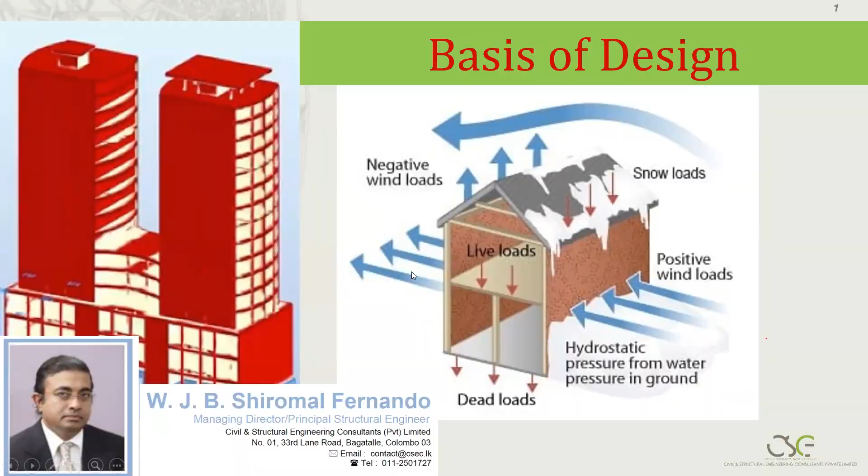As Kirivaran correctly said, my colleague, former colleague, who has been working with me on many tall buildings. As a young engineer, I was very proud of him, very hardworking. Unfortunately, or fortunately for him, his passion is more to teach, so he joined the university, but he had been working with me on many tall buildings during his stay with us.

So we were lucky, I was lucky to get involved in many tall buildings during the last 10, 20 years. These are the buildings that we have already done. Some are proposed, some are most of the buildings we have completed.

Also why we need to learn about it is now - this is what you see, the emerging skyline in Colombo. It happened during the last 5 to 10 years. We were amazed to see the change in the skyline of Colombo. You can see the number of buildings that has come during the last 5, 10 years.

And also we have a lot of projects that is going to come in this port city, new 4 square kilometer development.

So basically, if we learn the art of design, then we can retain our engineers as well as retain the knowledge within the country, as well as we can also retain the financial benefits because of this development. Otherwise, there will be a lot of foreign consultants coming in and setting up their firms, and most of the money will go outside, and the knowledge also will go outside.

So unless we train our young engineers and make them ready to take up these challenges, we will not reap the benefit of these developments.

So with respect to the basis of design, as a structural engineer, we have to look at mainly not only the gravity loads, especially when it comes to multi-stories and high-rises. We have to look at gravity loads, that is the self-weight of the building, and with height, it becomes larger and larger.

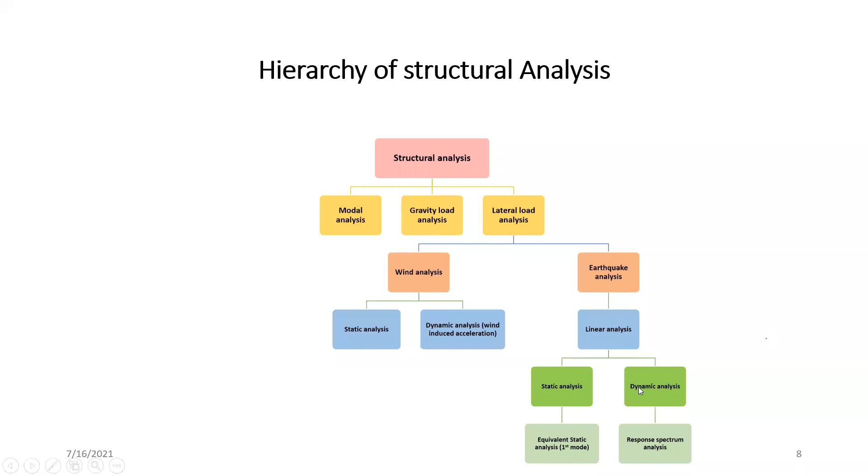So when you look at a multi-story building, we normally have to analyze the building - we have a couple of analyses: modal analysis, then gravity load analysis, lateral load analysis. We have wind load, static as well as dynamic analysis, where we calculate the accelerations. With respect to earthquake, we can have linear analysis for normal structures like static, and also dynamic analysis using a response spectrum. We will discuss all that in this talk.

And also the loads - when you have a load, we not only talk about a particular load applied on the structure, we have to look at a lot of combinations. We normally consider about 200 combinations with respect to high-rise buildings. This is the service combinations, especially one dead, one superimposed dead load, and one live.

Likewise, with wind in X direction and Y direction, we have to combine ultimate combinations. There are wind ultimate combinations and also earthquake ultimate combinations. The factors you see are based on the Eurocode, so you can have many combinations. For a small building, we consider wind in X direction and Y direction, but in a tall building, we consider wind in every 15-degree direction, because we use wind tunnel tests to calculate the effects. So all these combinations have to be put into your program, and then try to analyze.

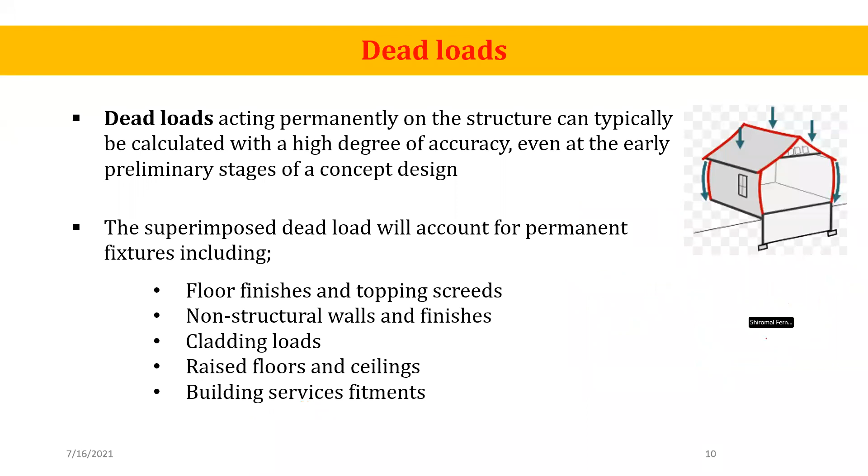For live loads in car parks, we normally use the British code BS 6399 for the driveways. It gives the recommendation for car parks, like 2.5 for the parking areas, driveways 5, and likewise for ceiling weights and crowd loading.

But what we have to understand is when we design a building, we design for a particular purpose. But actually, this building is going to last more than 100 years, and the purpose can change. So when we design a building, it should be futuristic - you cannot just go and do something, it should be flexible to change. Today's apartment building can be an office building tomorrow, and tomorrow's office building can be turned to something else.

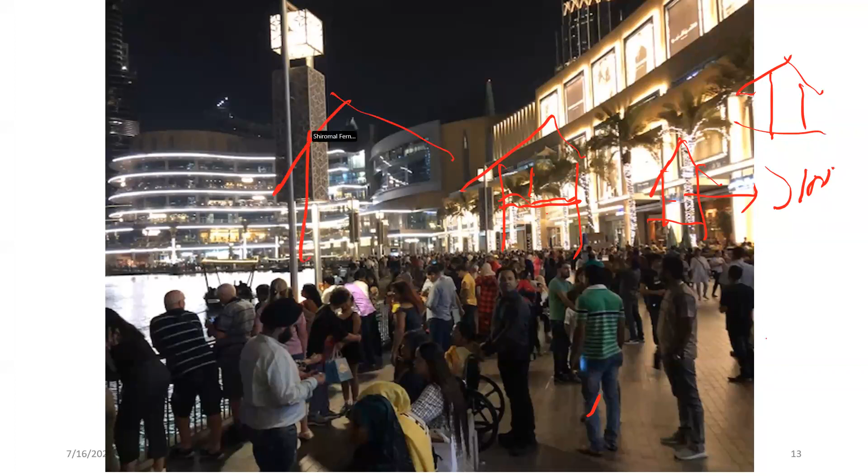So when selecting the dead weights, we have to have a logic with respect to this. We have to have a minimum load that we need to design a slab so it can accommodate future changes, and we have to have large column spaces so that we can change with time.

We will discuss this with time. Also, here is a good example - we design for a particular load, but during construction there is always additional load for stacking purposes. So sometimes if it is more than our live load, we have to ask the contractor to maybe support the slab in between, so that it will reduce the slab loads.

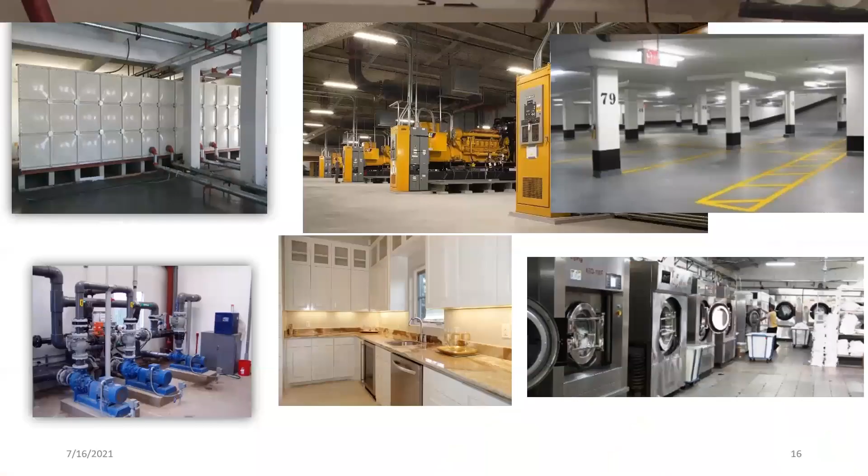These are the services at different levels, especially at the bottom level, all the services. So for service loads, you cannot just blindly take 0.5 - if the service loads are very high, we have to assume a higher load. Also there are sometimes water tanks, so we have to take the water load, machine rooms, generator rooms, kitchens, laundries, and parking floors. So for different areas you have to look at the different loads.

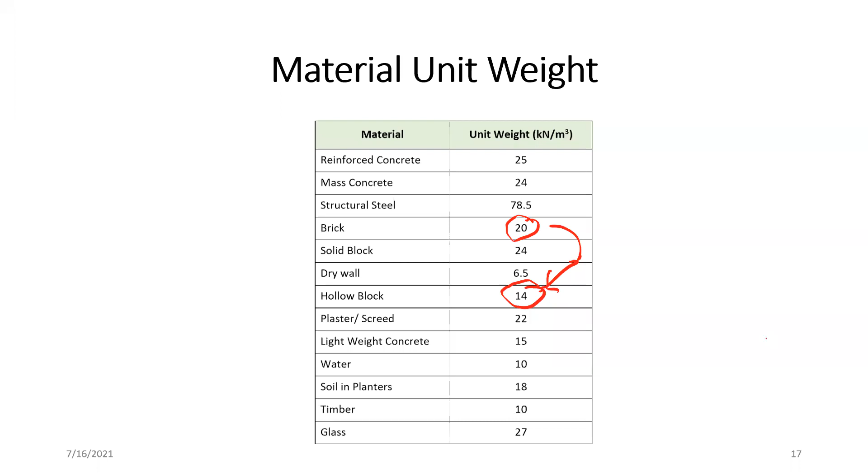This is the typical material weights that we can use. What you have to understand is brick weight is around 20 kilonewton per meter cube, whereas hollow block is around 14 kilonewton per meter cube. So we have to educate the client to change, for the sake of economy, from brick to block. It's a very difficult task, but we need to do it. And these are the recommended loads.

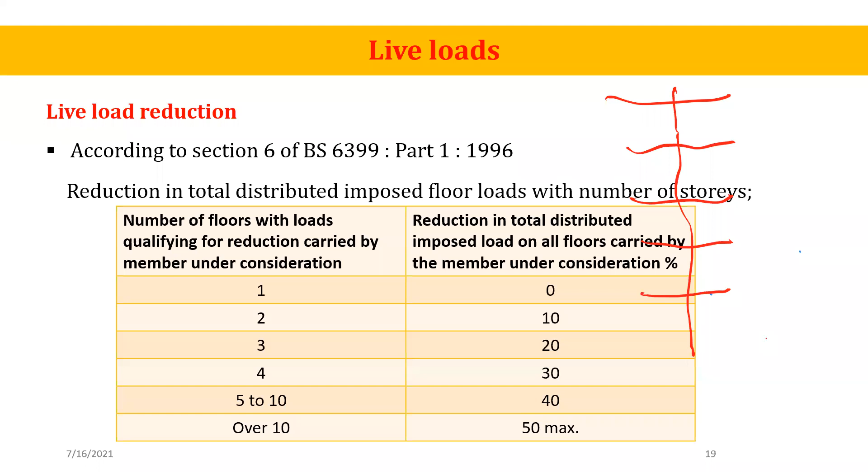The reason is there's always a probability in loading - during the lifetime of the building, you will not get the 100% load. So generally, the first floor we do not reduce. Second floor 10%, then 20%, 30%, 40%. From the fifth floor onwards, we can reduce, 5 to 10 floors 40%. After 10 floors we can reduce up to 50% of the live load.

With respect to very large areas, there is a provision in the code - we can reduce about 200 square meter slabs by 25% of the live load. So likewise, these are the probabilities given by the code which we can use.

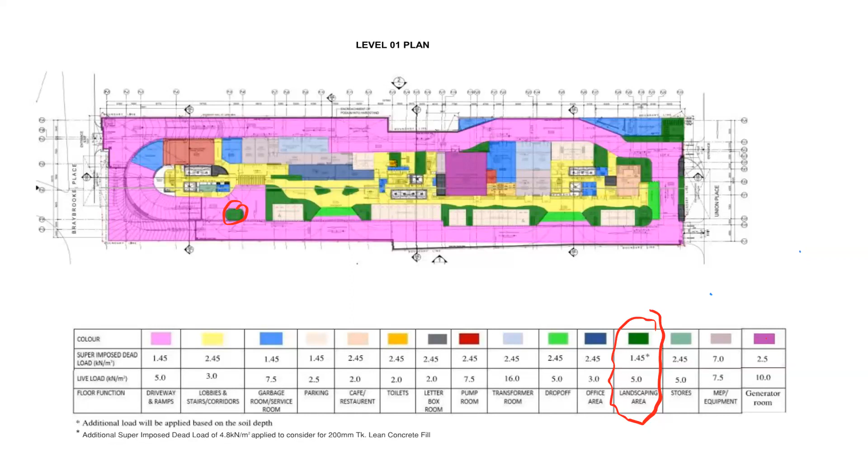When you look at a particular slab, you will have different types of loads. Maybe the green color is for the planters, so you have to have the landscape particular load. When you design something, you have to show all this in your drawing so that the contractor knows how you have designed and what assumptions you have made during the design. Similarly, in a particular slab, you will have different loading at different levels, which we need to show by a chart. These we may not be doing now.

Better start practicing. And mainly, the other thing I've always wanted to tell you all is we normally rely on the computer to get the vertical loads. So generally, I always make sure we do a manual calculation and check the computer load, because computer is garbage in, garbage out - we might make any mistake. So basically, you do a manual calculation and check whether your loads are matching with the computer software. These are good practices. This is what we wanted to introduce in this section.

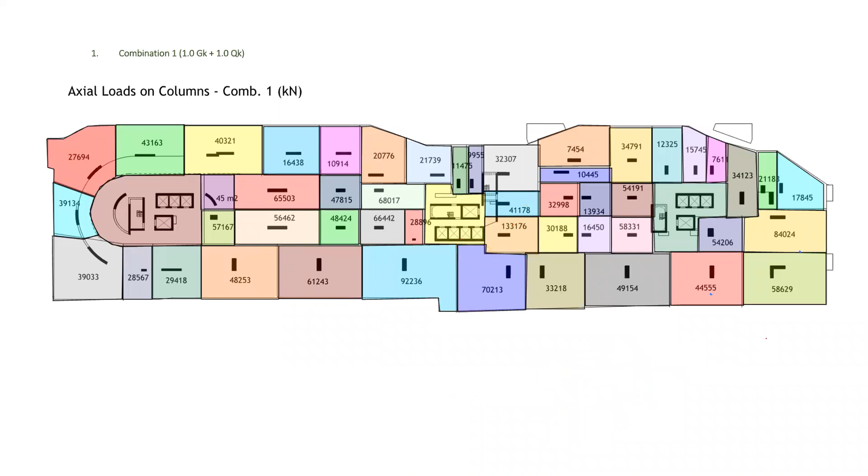Let's look at the wind loads. When you look at wind load, we just cannot take a particular wind load and design. We need to consider different aspects: the exposure conditions, where your building is, and also the wind climate studies - how the wind varies with time of year, and what is the return period in a particular zone. So we cannot just go and look at the CP3 chapter 5 or BS codes or other codes, try to get a figure and put it into the listing.

It will differ from place to place and based on the elevation. Sometimes we might need to do wind tunnel studies, which is recommended based on the slenderness of the structure.

In wind design, we need to look at two things. One is strength, so our building should not fail because of the wind, and also people in the building should not feel it move due to the wind. Especially in tall buildings, this is one of the major problems where the top stories can feel the motion, so we need to make sure that it won't happen. Also, when there's wind, there is a deflection, and we have to control the deflection - that is a serviceability condition.

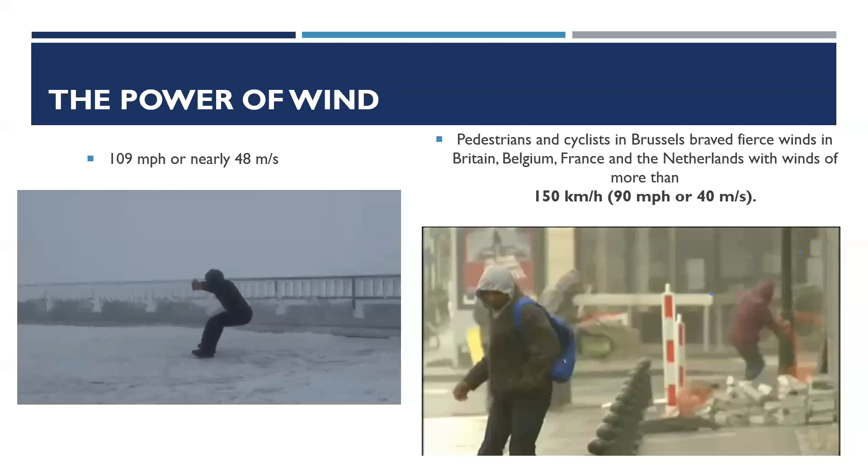This is a cyclonic wind - you can see it's very strong. This is the wind force we designed the building for, the cyclonic wind. It is in the range of 48 meters per second. During a cyclone in Jaffna, you will get much higher wind speeds.

So these are the wind speeds that we designed the building for, not day-to-day buildings.

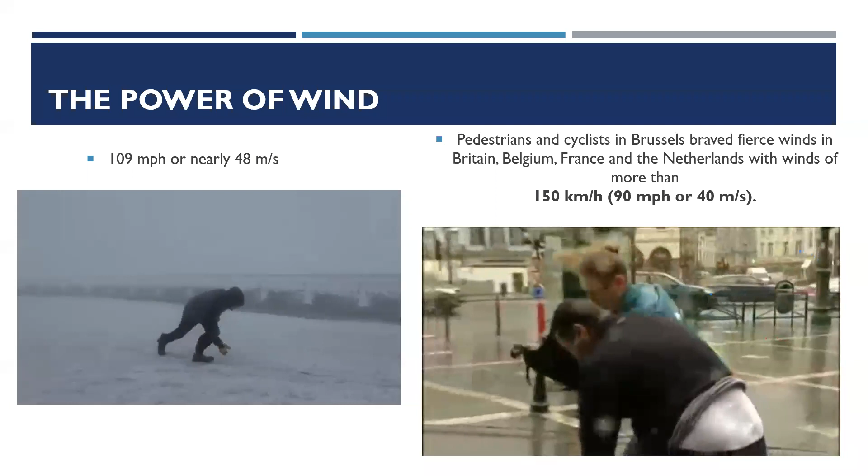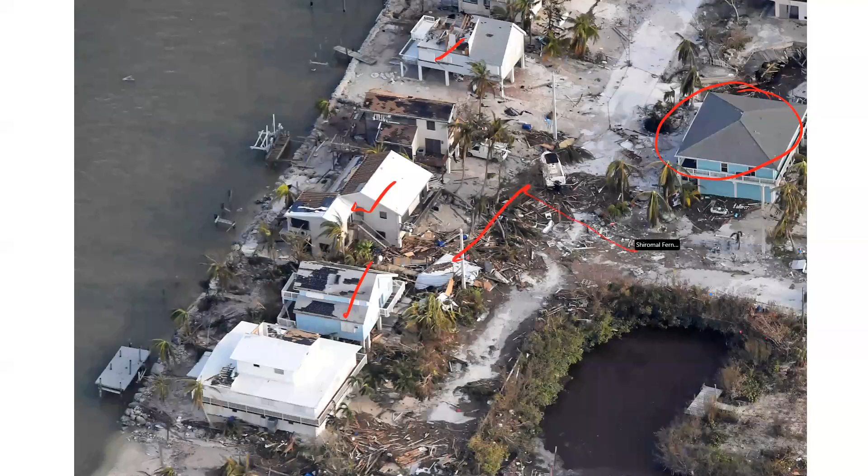Now, this is what happens after a cyclone. You can see all the gable roofs are gone, but the hip roof remains. Because of the wind, when it blows, it sucks. If the roof angle is very low, it sucks. But if the roof angle is high, it will hold the roof without flying.

The main problem is, as structural engineers, we have to understand that due to natural disasters there's a huge loss to infrastructure, so it's very difficult for a community to gain control over the disaster. There will be a lot of life loss, material loss, and economical impacts to that region. So for us as engineers from these northeast areas, cyclones are a major issue.

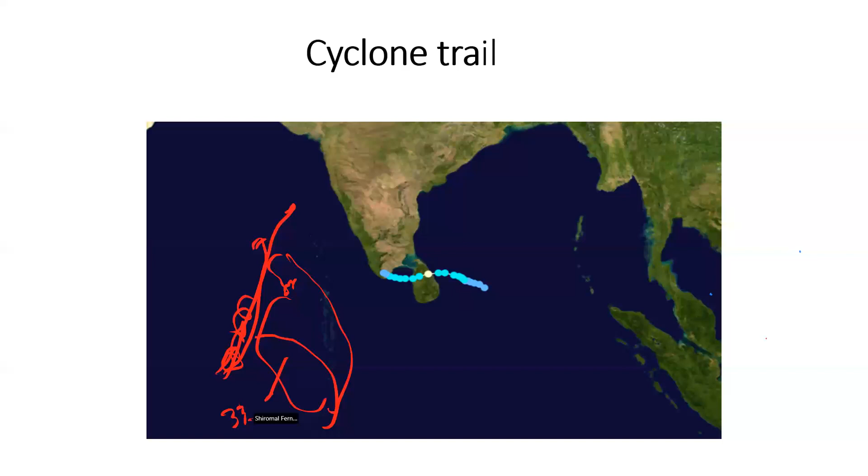And also, the dominant wind direction is the southwest wind direction. Similarly, we have to study the wind climate data. I think somebody from your region needs to study the wind climate data affecting that region - I don't think anybody has done it.

So we have installed anemometers to monitor the wind - we've installed a couple in Lotus Tower and Hyatt Hotel to look at the wind data at different levels. Sometimes we think the cyclones will not come to Colombo, but I have my doubts.

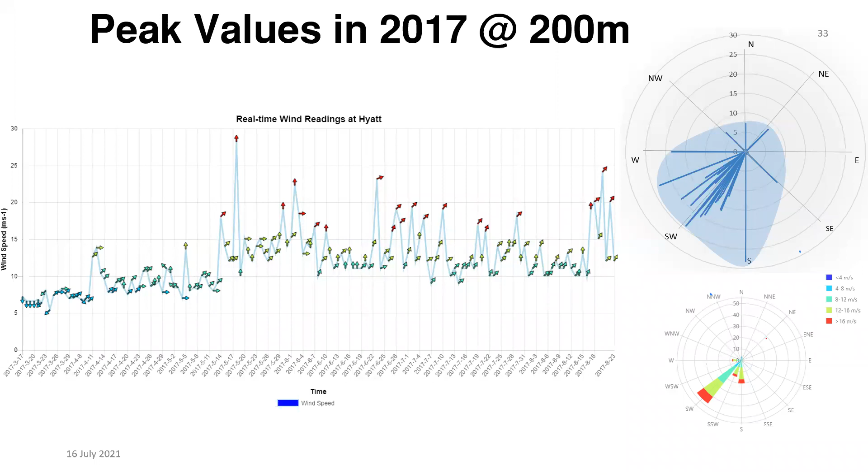As I said earlier, the north is the highest wind zone, so most normal structures shall be designed for 49 meters per second. With respect to Colombo, it is a very high wind speed. Post-disaster structures like hospitals, schools, and important structures, even multi-story buildings, I would consider designing for 54 meters per second, because we cannot build multi-story buildings that get damaged every cyclone - there will be huge infrastructure cost to the client. So I would recommend you design all structures, especially multi-story buildings, for post-disaster conditions, because you try to save a small amount of money for the client now, but he will suffer in the long run, and the communities suffer too.

We normally consider cyclone wind speeds as the ultimate wind speed, based on data with a 50-year return period. The possibility is not that it comes every 50 years, but the probability return period is 50 years. For instance, tsunamis have a return period of 400 years. So after this tsunami, I don't think we should stop worrying about tsunamis, because it won't come again soon - that's how these natural disasters work.

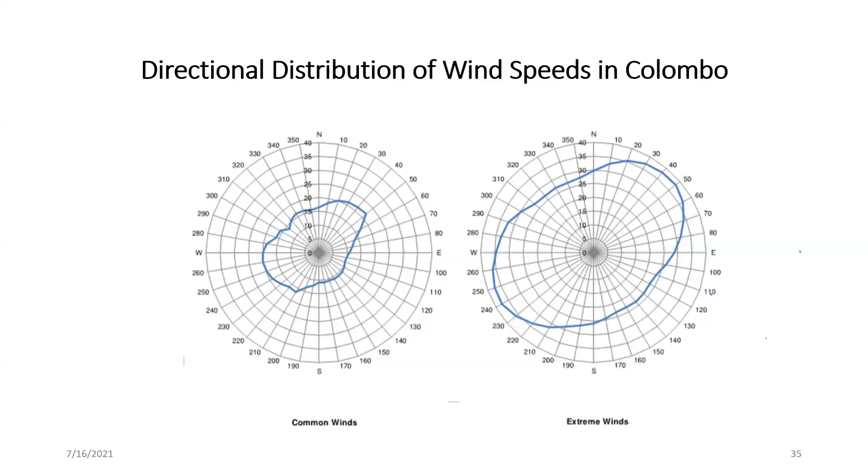So these are the wind roses - this is the normal wind, and also this is the extreme wind roses. Generally we have to give this climate data to the wind tunnel people so that they will calibrate their wind speeds according to that.

And when you talk about wind, if your building is in flat terrain, you consider the terrain category, so you will get the full blow. This is open country, and then if you are in the suburban area - because there are blocks due to this - the lower buildings will not get much wind load, you can have a lower wind speed. Higher up, basically this is the urban areas, there will be a lot of buildings.

So when we are designing high-rise buildings, we normally go for a wind tunnel test. We also need to look at the interaction with other buildings. There is a lot of software you can use to get a preliminary idea about wind modeling - you can model a city, you can model a building.

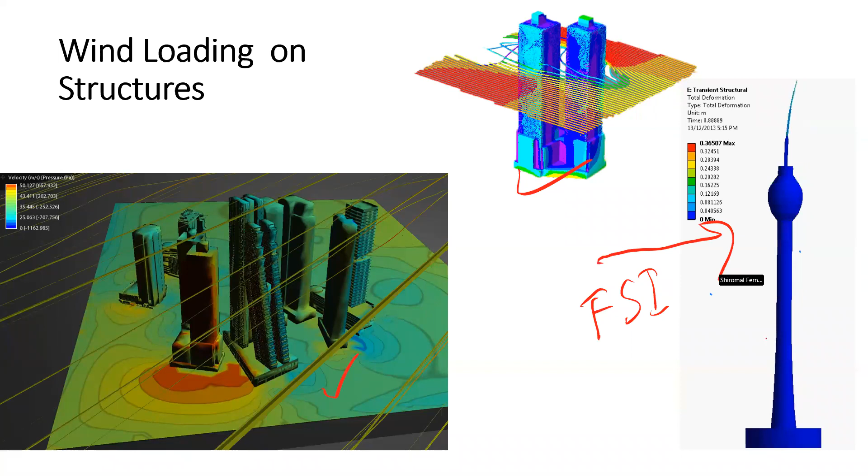This is called FSI, fluid structure interaction - when the wind blows, the structure moves, and then there's a buffeting action, you can see. It's a very complicated modeling technique, so the computer software is very advanced. We call it CFD, computational fluid dynamics.

These techniques are used in airplane construction, also car manufacturing, and now it's applied to buildings. These are very interesting software - if there are young people, better get hold of this software, it's available now.

The software that we have used is called Fluent, and also I have used SolidWorks - it's a very easy modeling software, we can use that. And even Autodesk has introduced a software called Flow. You can use one of these softwares to get an understanding.

You can see where the Lotus Tower building is moving in one frequency, and also you can see the antenna is moving in a different frequency. So very complicated analysis you can do now.

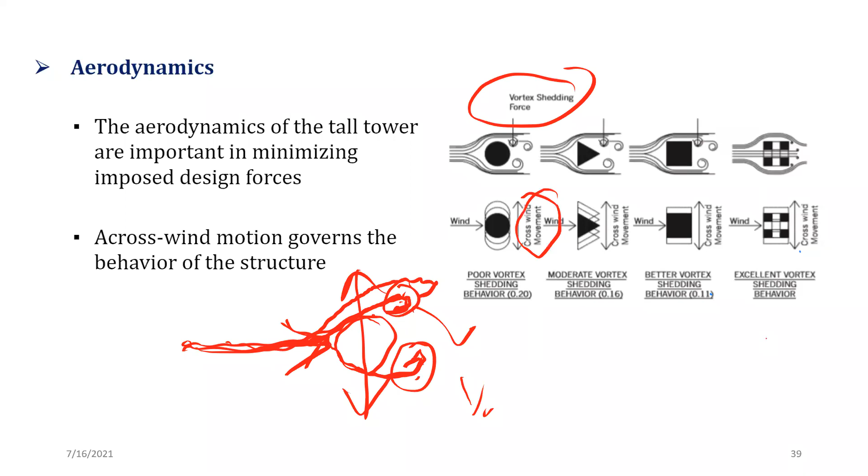We call it crosswind movement. Crosswind movement is very critical, especially when we design high-rise buildings.

Also, the crosswind effect is different with the shape. When you have voids, it will be somewhat more different. Sometimes for complicated structures, we need to go for wind tunnel tests to understand the real behavior. This is a CFD analysis we have done, where you can see the vortex shedding and the wake.

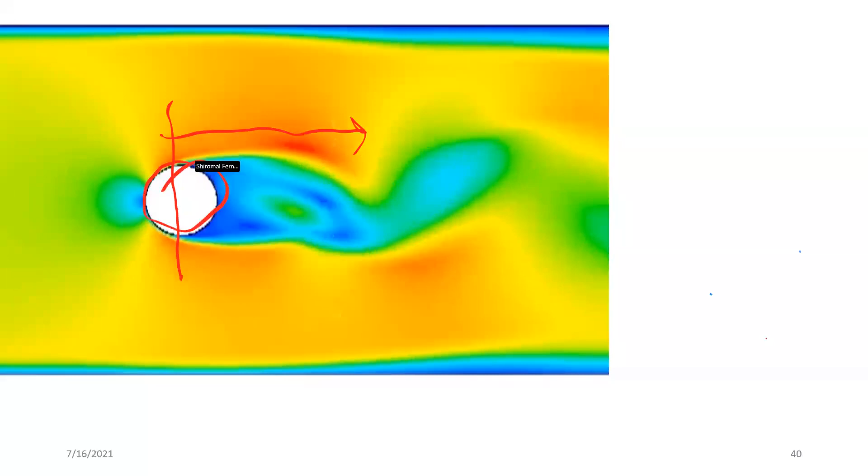It depends on the shape of the structure. For the same wind speed with a different shape, just round corners on a square, you get a different vortex shedding, and also different force. So the same area - just calculating pressure into area will not be the same thing when we come to the topology.

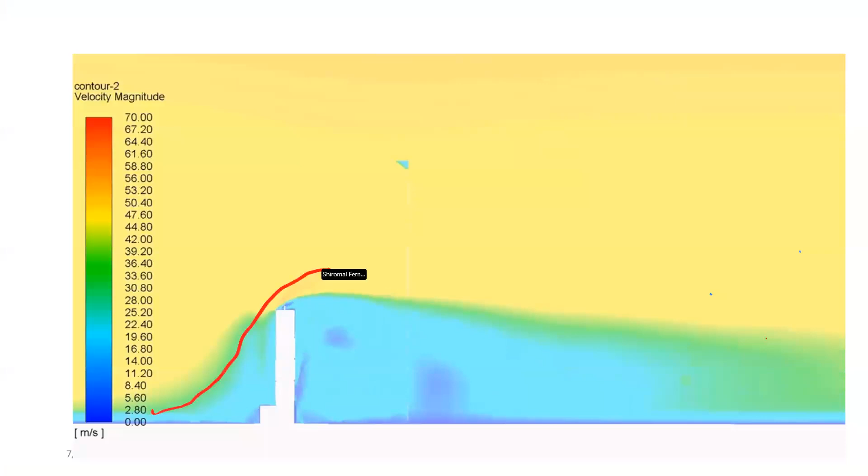Also when the wind moves, it speeds up. The force here and here is completely different. So we have to do a proper study with respect to CFD. You can see you have a negative force behind, and a positive force here, and it varies.

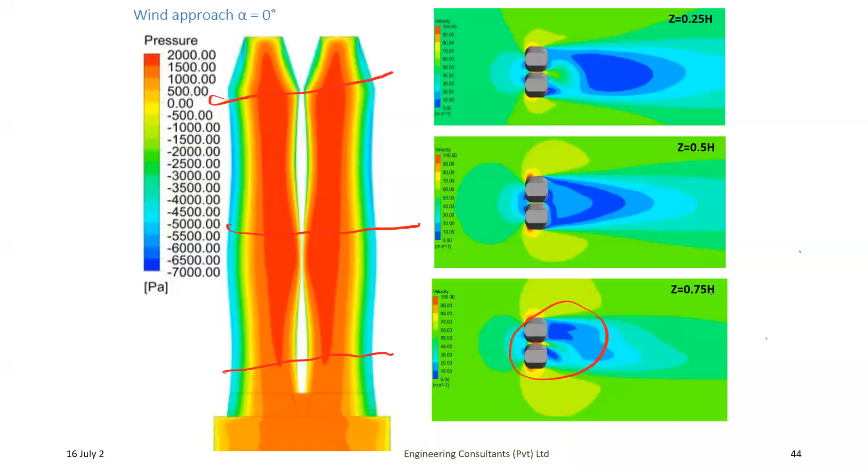So you can see with the height, at this level you have a different shedding. You have a different shedding here, different shedding here. So it's very complicated. In this one, Kiribaran did this analysis, I hope.

So basically, this is the building. It's like a wall. There were a few buildings behind, and we were worried what was going to happen because of these buildings, and these buildings can get affected. So you need to properly analyze these buildings.

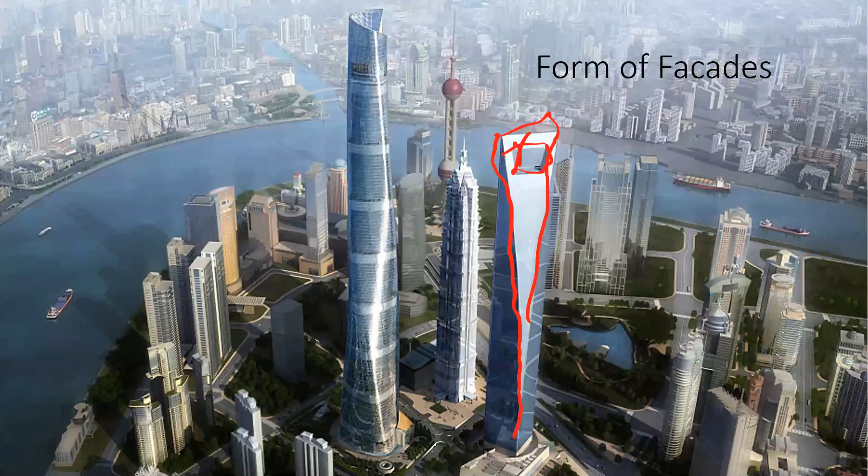Now you can see this is Shanghai. You can see this building - when you go up, the shape differs. I told you there are huge wind forces. To reduce the wind force, they have cut a hole. If you look at this Jinmao Tower, you will see this kind of detail - this is also to reduce the wind speed here.

Now, if you look at the Shanghai Tower, it's a 600 meter tall building. Every section is different, and the shape has been designed based on wind tunnels to reduce the wind forces, because by that you can reduce the cost.

Why have they done it? Let's say you have a pole-like structure with the same cross section. When the wind blows, we have shedding. The same shedding will happen provided you have the same wind velocity. So if this shedding frequency equals the natural frequency of the pole, the building will resonate and fall.

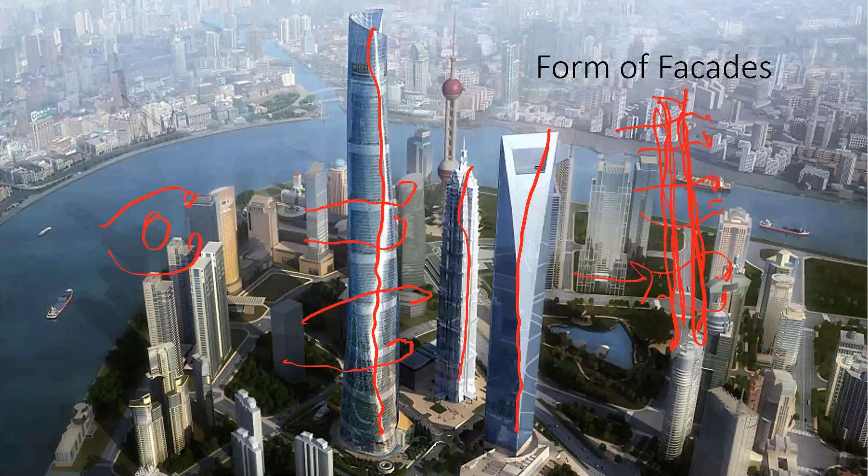This is why in tall buildings especially, they will not have the same shape throughout. Basically what they do is, when we design something, we try to confuse the wind, so the shedding frequency will never match the building frequency, and therefore it will not resonate.

Generally we model about 500 meters radius in the wind tunnel, and I hope I have some slides. From here we can get the building forces, the cladding forces, and also the pedestrian level forces.

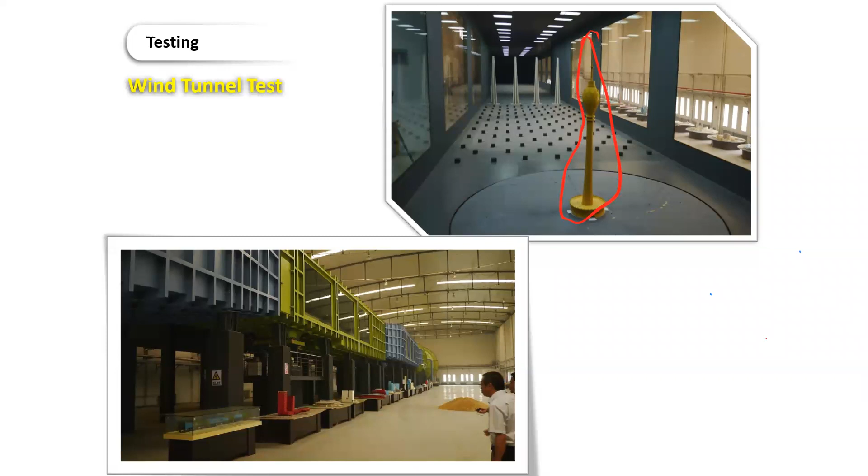This is the wind tunnel that we have used for the Lotus Tower. I have been to all these wind tunnels. This is the tower, and it's a very long tower. This we did in China, and we got all the forces based on the wind tunnel.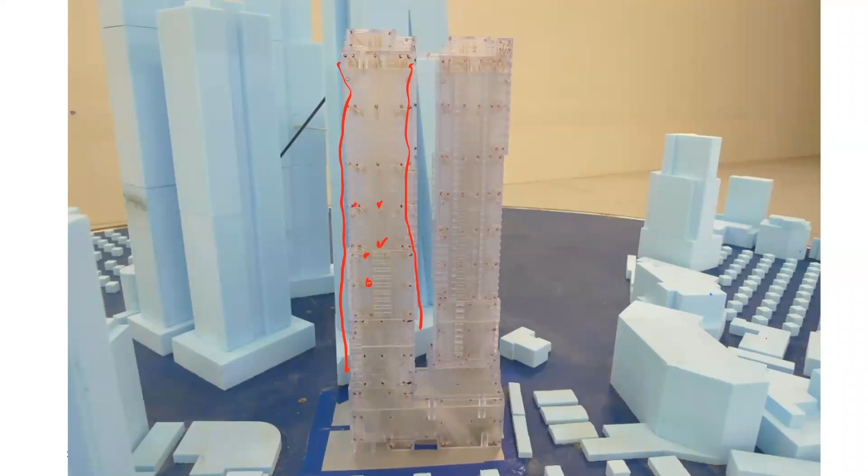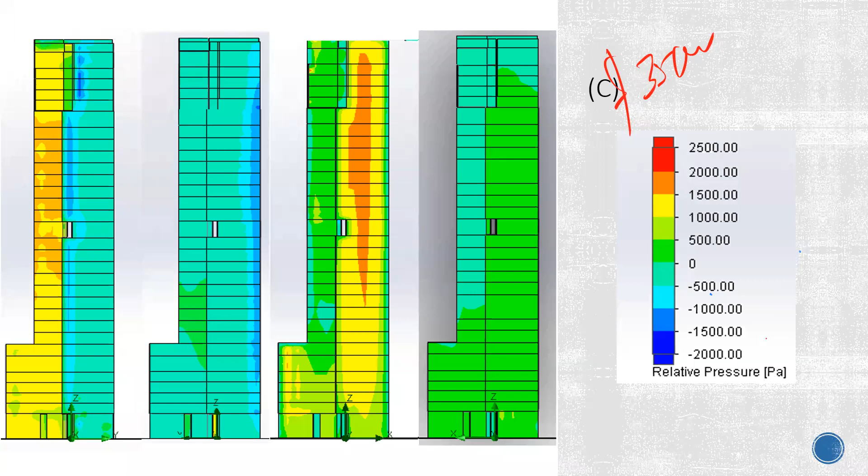Here you can see from the CFD, different areas, we can get the pressures. Now, most of the time, to do a wind tunnel test, it will cost around $35,000. But a lot of people don't want to go to wind tunnels, or think that we are doing experiments with their money. So we have to use CFD methods to calculate. There are different types.

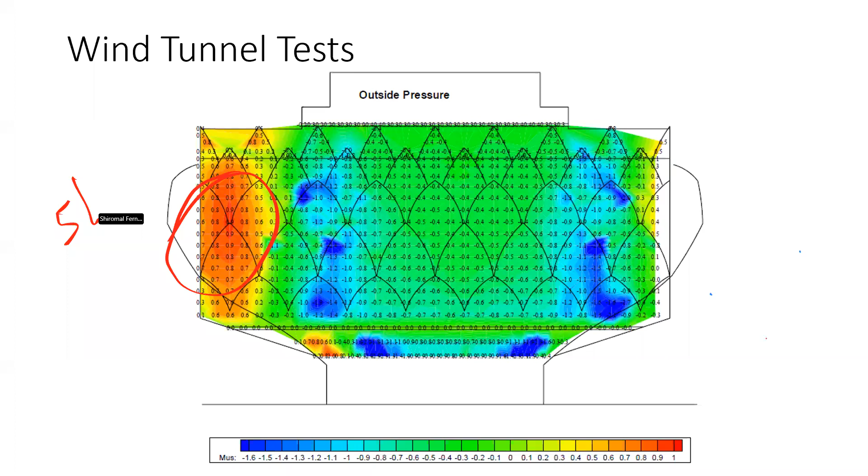Generally, the prototype scale is about 1 in 400 to 1 in 500. So when you do a wind tunnel test, you can get very high winds, which we will not be able to estimate using codes. If we made the code, generally we design the facade for about 5 kilonewton per meter square, very high wind speed.

So for wind effects, generally a 10-story building will move about 15 millimeters. A 30-story building will move around 50 millimeters. A 50-story building will move around 200 millimeters.

Mainly the problem is the people on tall buildings will have perception issues. Very sensitive people can even sense 5 milli-g vibration, but most people are in the range of 10 to 25 milli-g. So when we are designing tall buildings, especially for offices, we design for about less than 20 milli-g. For residential, we design for less than 15 milli-g.

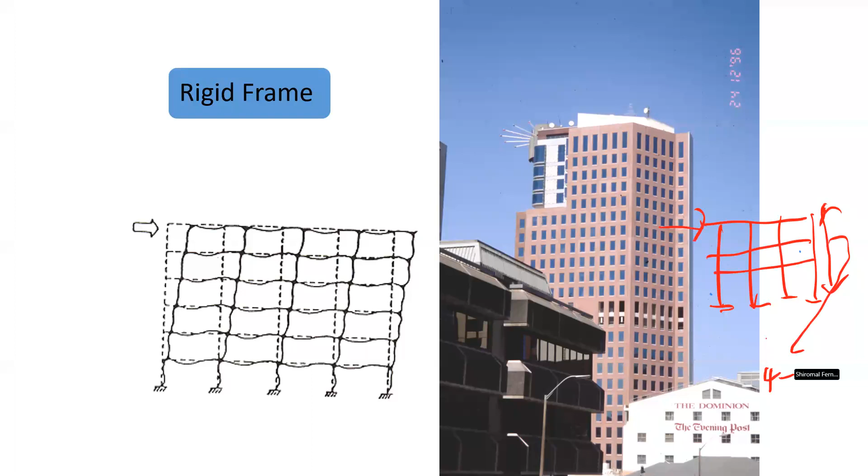So basically, with my experience, I will tell you, you can go up to about 14 to 15 stories using just a rigid frame. When you go above that, we have to incorporate some shear walls into the structure. So in this case, let's say you have a frame like that - maybe you can use a core to resist the shear, or you can use frames coupled with the core.

So if this is only a rigid frame, that is an unbraced frame, where wind will be taken by that. Sometimes if our cores are very large, the total wind load can be taken by the core. Otherwise, we can engage the frame and the shear wall together. Those days we used to analyze this because there was no software to analyze 3D.

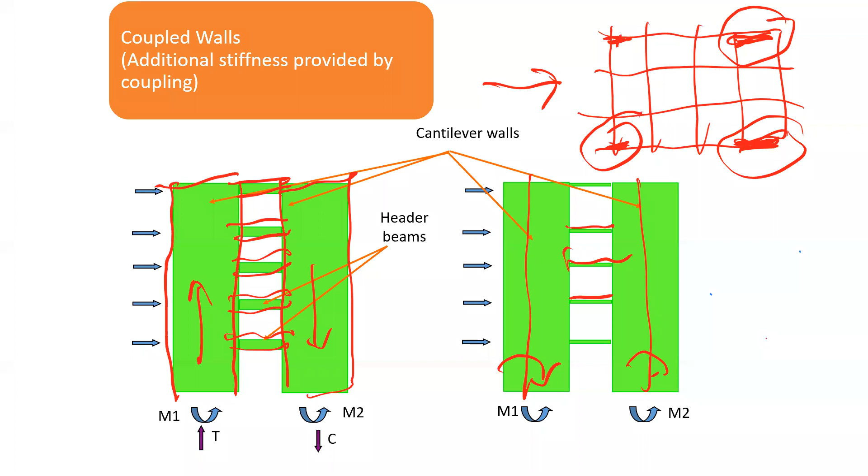So basically, let's say you have a building with a shear wall here, and let's say you have a small shear wall here. When you apply a wind force, this wall, based on the stiffness, will attract a larger force than this wall. It will always be based on the stiffness, and based on that, you can design.

These are actually applicable to tall buildings, where generally we try to use outriggers and spandrel beams to connect to the core wall, so that it will act together. So there are many tricks that we use when designing tall buildings in order to tackle the wind. I will just introduce this in this course.

You can see these are the outrigger spandrel beams and the outrigger levels. Mainly, we put them at the service levels, because when you design a tall building, you have to have service floors every 20 floors.

If we try to do a high-rise course, we can do it. So these are my experiments with respect to the structures.

So it's a 50-story structure. If you don't have outriggers, it will deflect 200. If we have one outrigger, 185, and also here 175. With this experiment, what I'd like to show is that this area will act like a cantilever.

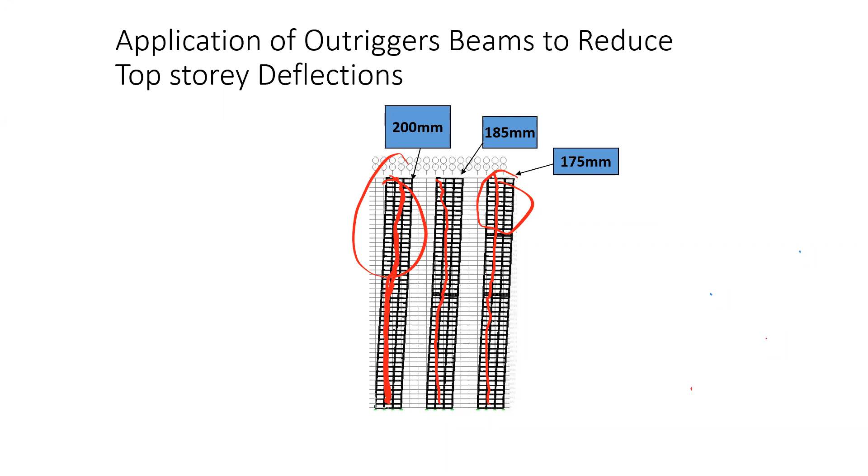These are for very high buildings, more than 60 stories. These are called super tall buildings, where the whole tall building is like a suspended cantilever. So this whole thing will be a cantilever.

What will happen is there will be columns at like 3-meter centers, and it is like a frame tube joined by a spandrel beam, acting together. So generally you get a shear lag at the corners, and you get higher axial forces at the corners due to the shear lag.

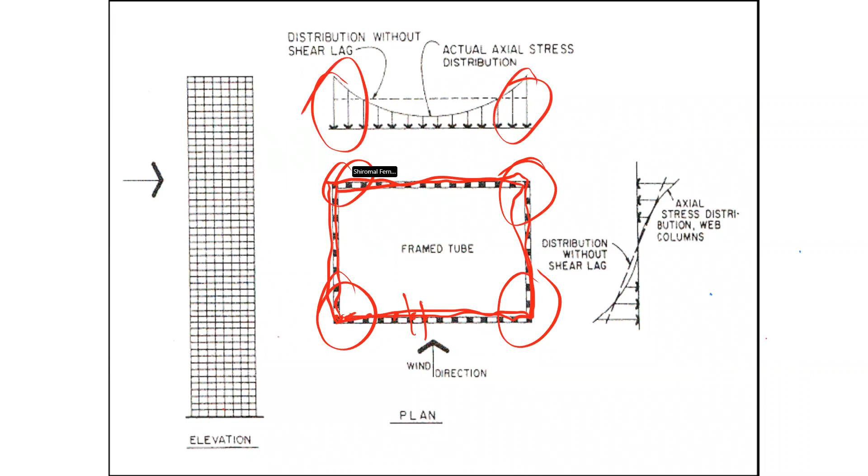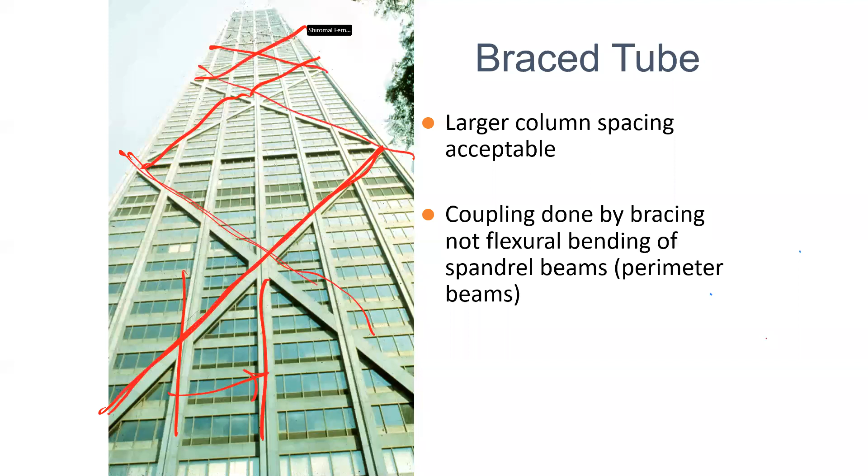Again, this is for high-rise structures, where if you want to increase the column spacing, you need to use a brace frame to brace the tube, and then you get a braced tube structure. You can see all that.

Mainly the idea is, how do you make it more efficient to resist the wind? So if it is equally spaced, it is 50% efficient. If all the mass is at the corners, you can balance it, so this is 100% efficient, but at least you need to go to about 67% efficiency with respect to the lateral force.

These are called performance criteria, following ISO guidelines, where for a 1-year return period, your office building has to have acceleration in between let's say 7 milli-G to about 13 milli-G. For a 10-year return period, it is in the range of 10 milli-G to like 20 milli-G.

So this is the modal analysis. Actually, there are so many buildings together. When you analyze a building, your first mode should be translation, and the second mode should be translation. The third mode, because there are so many buildings, should be a rotation, right? If you do it for one building, you will easily see that.

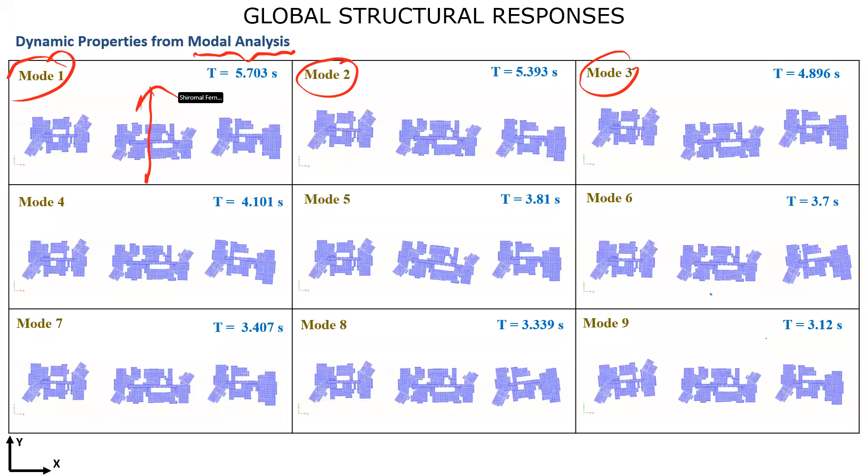So from the period, we can see the period, 99% is translation. Here, mode 2, this is building 2. Building 2, let's say building 2. Here it is a rotation. Building 2.

There is a translation here. So basically, sometimes for very tall buildings, you might not get the ideal situation, but for most normal buildings, you will get this ideal situation.

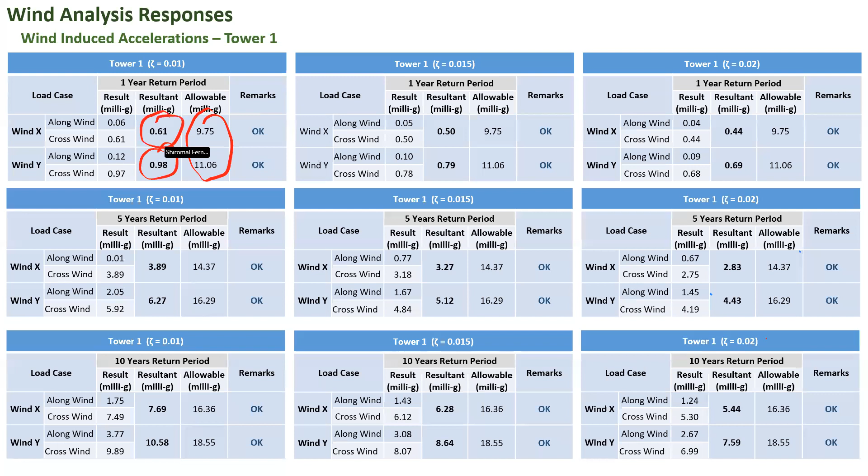Then we calculate the accelerations, and these are the allowable accelerations. We calculate the acceleration mostly using the code. When you calculate in the service condition, we normally use a damping of 1%. These are more relevant to the, so for completeness sake, I have put it in.

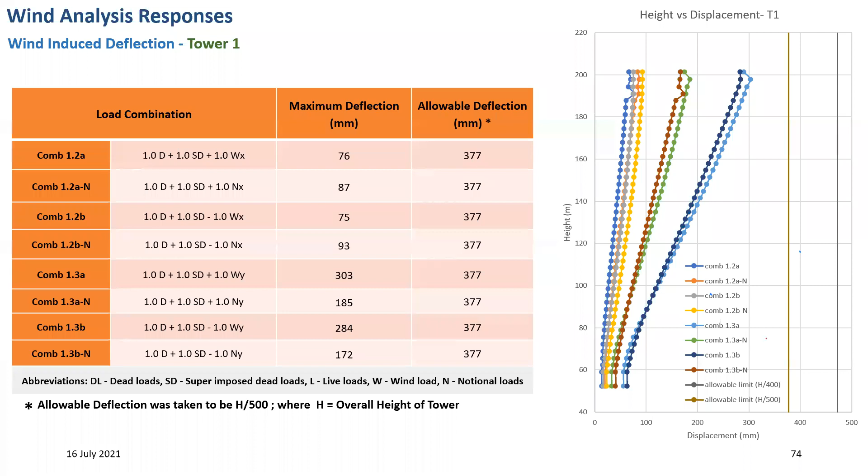Here, this is the building drift. Drift is generally 0.2%, that is height over 500. Now let's say you have a 3000 millimeter building height. If you divide by 500, you get about 6 millimeters. So basically, that means the relative displacement between this floor and this floor maximum is 6 millimeters.

You need that, because if it is more than that, your facade will break. For tall buildings, we can go up to height over 400, but then we have to tell the facade people that this building drift is much higher, and then you need to look at that.

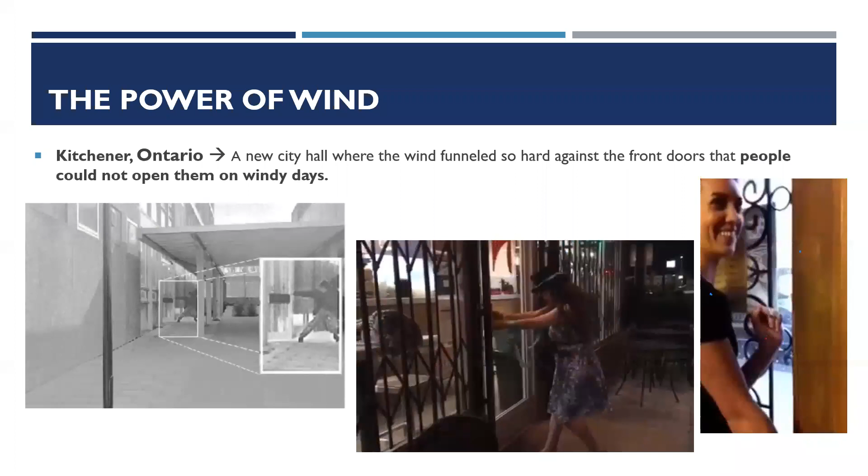Pedestrian level wind is very important when we build buildings. Due to the wind, buildings affect people, though there are no hurricanes or anything like that here. For the normal wind, this is what is going to happen. I think in Jaffna, sometimes you get very high winds.

So it's very important, mainly because when the wind hits, it has a downwash, and then sometimes venturi effects, and also the effects due to what I told you about in the upper level, called the vortex effect.

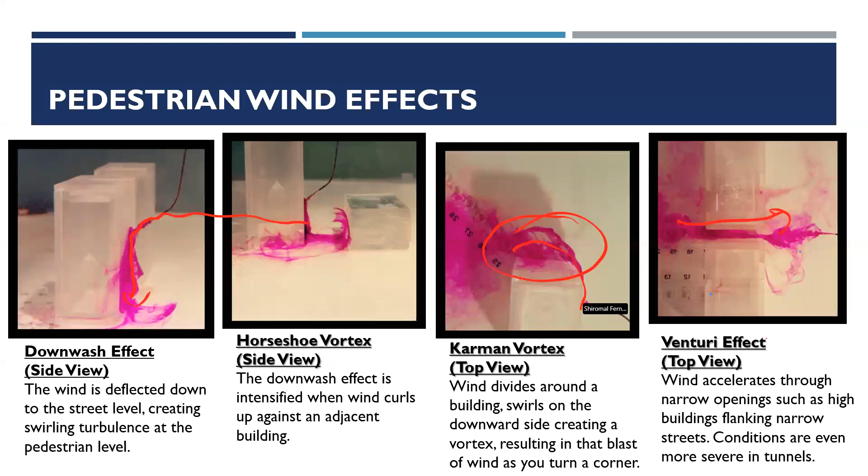So some of the mitigating measures, especially since I was talking about wind, Jaffna is a very windy place where you need to have tree covers to reduce the pressures, maybe barriers, screens, and also some cover.

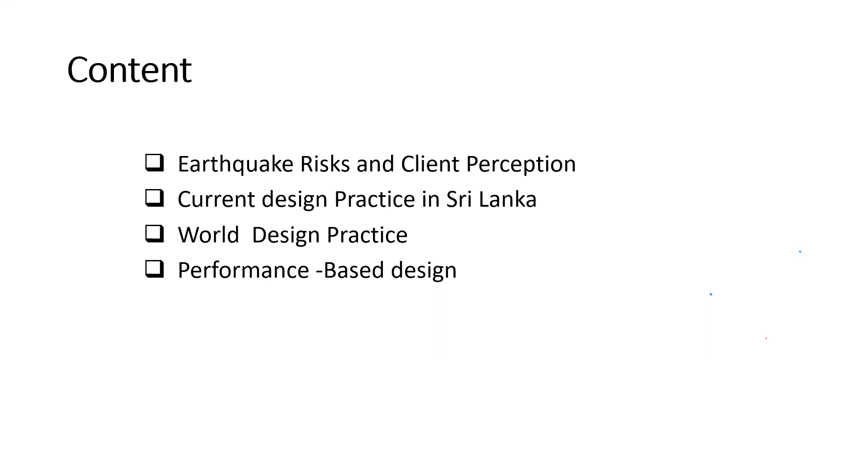Earthquake conditions, a lot of people think earthquake is not a major issue, where earthquake will not happen, but after the tsunami, people changed their minds. I will tell you the current design practice and also the world practice, the performance-based design practice that we do in our office.

So basically, if you look at the seismic monitor every day, every minute, there are a lot of earthquakes happening around. We got a major issue because of the earthquakes in this Burmese plate, and then we got a tsunami due to that in 2004.

So mainly, the whole world has been divided into 13 plates. We are in the Indo-Australian plate. Mainly, the earth's plates are not dead, they are moving all the time. Some plates are moving toward each other, some plates moving away.

So because of that, the stresses will get built up, and then there will be shakes. So luckily, Sri Lanka is very close to, is in the center of the plate. And Australia also thought the same way, but after the Newcastle and Sydney earthquakes, then people were thinking, what happened?

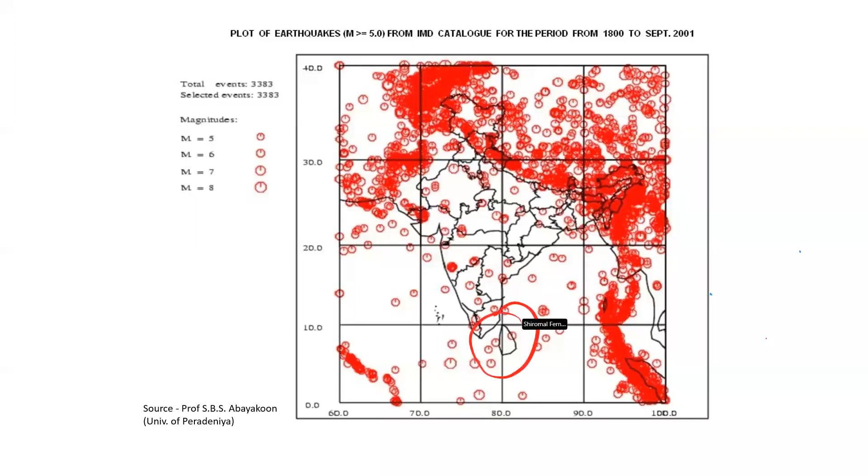So basically, this is work done by Professor Abayakoon, a Peradeniya University professor. These are the historical earthquakes very close to Colombo. You can see there have been a few earthquakes, and this is the possible plate boundary that you can see is moving away.

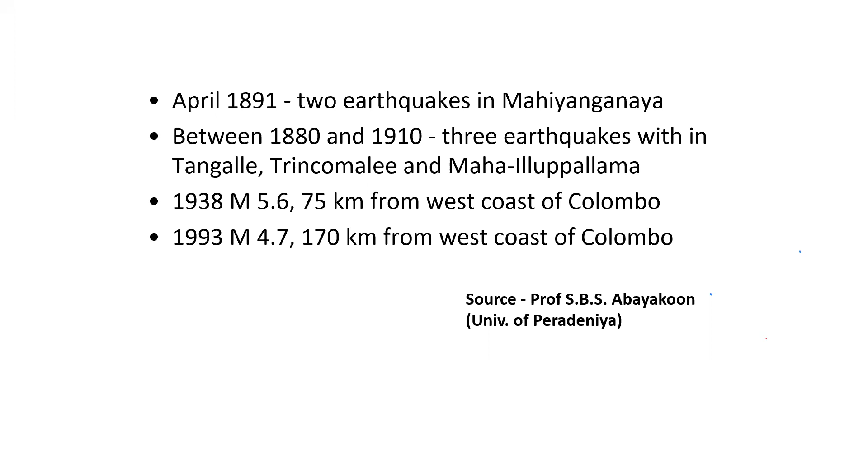So these are some of the dates and locations according to Professor Abayakoon's research. There had been two earthquakes in 1891 in Mahiyanganaya, between 1880 to 1910 three earthquakes within Tangalle, Trincomalee, and Maha-Illuppallama. In 1938, there had been an earthquake in West Colombo, and also in 1993 in West Colombo.

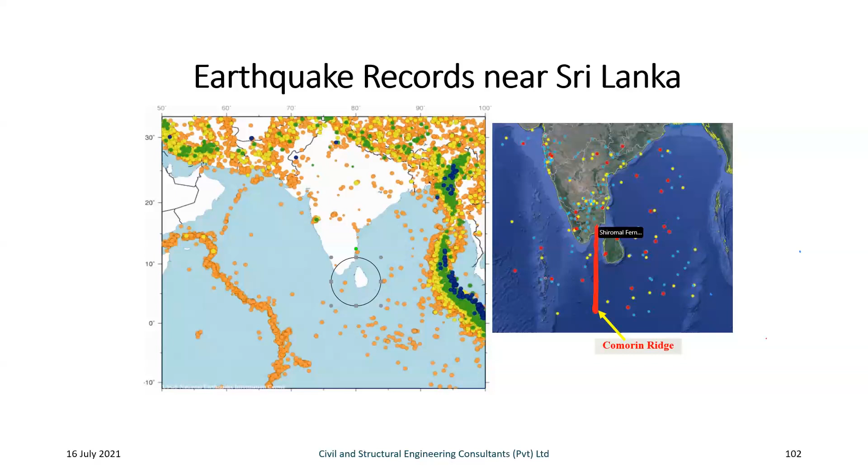In September 1938, there had been a major disaster. And also, according to geologists, there is a soft subduction phase where sediment fills this area, and then there's a possible hotspot very close to Colombo. What they say is we call it the failed Mannar rift zone. So these earthquakes, 1938 and 1615, are due to this. The main CBD is Colombo, and something happened very close to Colombo.

Then there will be a big disaster to the whole country, and we were interested from the beginning on this. In 1994, there was interest by the Society of Structural Engineers, and we were detailing according to the UBC codes, and later on the Society of Structural Engineers issued a guideline.

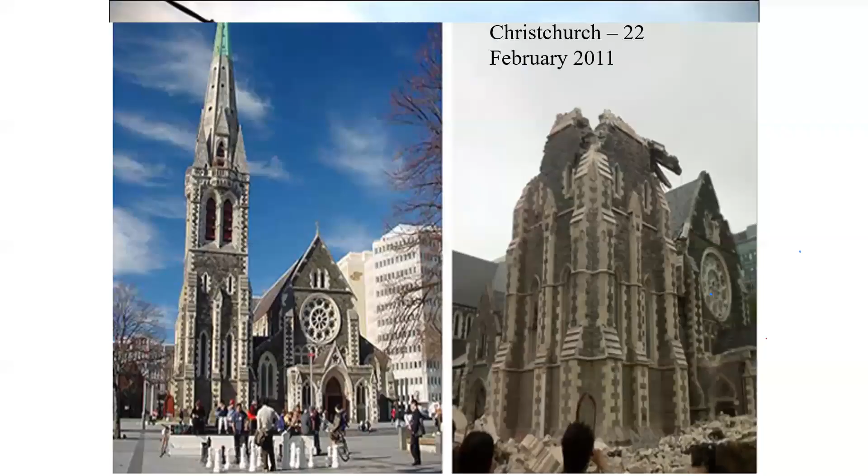I will tell you the reason. This is what is going to happen. Mainly, the tall buildings are safer in an earthquake than the smaller, shorter buildings. The reason is - you can see this building failing.

The main reason is, let's say this is the time history - this is the time. You get very large shakes at a very small period here, and it will die down within a couple of seconds, let's say 4 seconds - it will die down. So very high accelerations here, and the period is very low. When I told you, the building period is equal to the number of floors divided by 10.

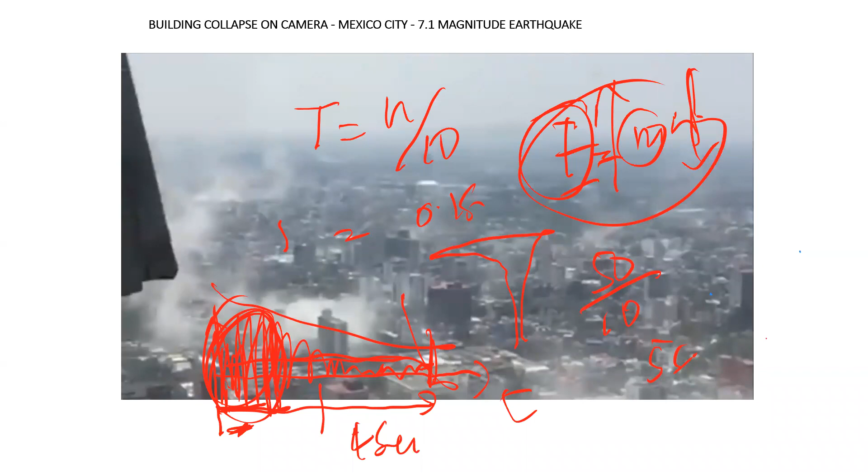So what happens is, especially if there is a shake, if your soil is very loose - due to the earthquake there will be huge energy, and due to that we will have a very high pore water pressure. When you have such a high pore water pressure, this soil becomes like liquid. So if that happens, your building will anyway fail, right? So if you're liquefied - generally when we design a building, we check the liquefaction potential.

So unfortunately, we don't have shear velocity tests in Sri Lanka. So what we normally do is we check the SPT values. If the SPT values are greater than 15, there is a very unlikely chance of getting into this liquefaction, so the liquefaction potential is very low. So if the SPT is less and you want to build something there, then you have to compact it to achieve that.

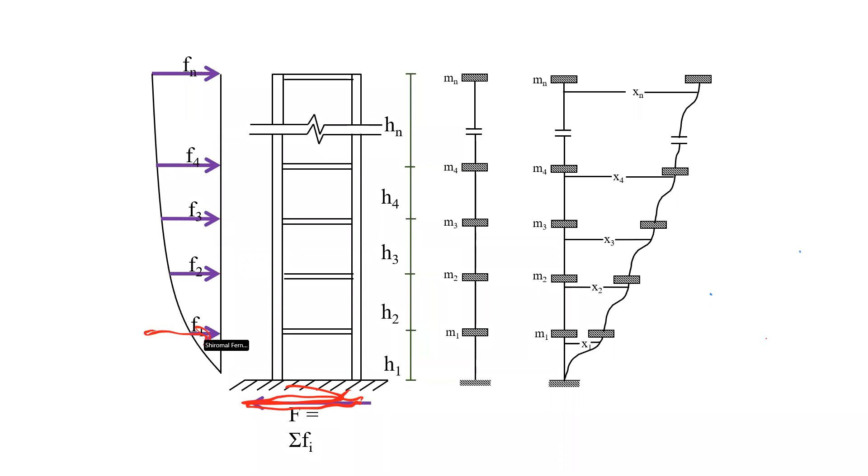So what happens during an earthquake is the ground is shaking, and the building starts resisting. When something is shaking, it tries to shake, and buildings start resisting the shake, therefore you get an inertia force acting on the building.

With respect to wind, the force corresponds to the area. With respect to earthquake, it corresponds to the mass. So there will be a shake, and then there will be an inertia force based on the mass and the acceleration.

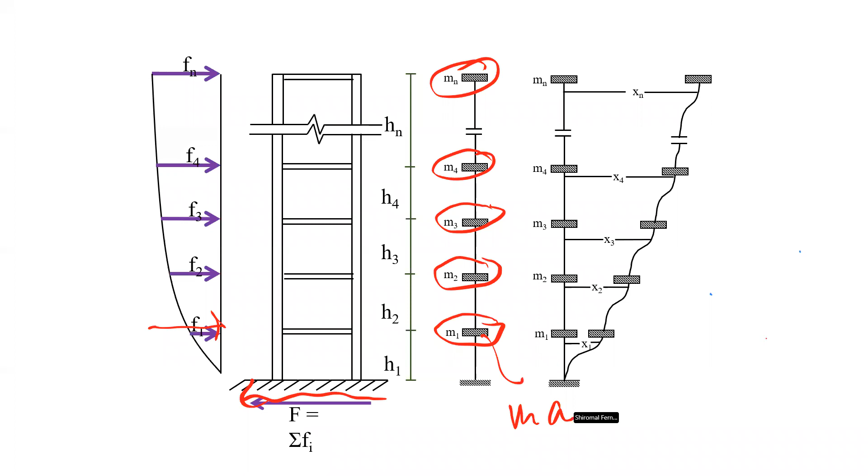So you can see, I showed you - the earthquake force is very high at the top, and this is why it failed.

And as structural engineers, what do we do? Now we have a force, so we have to dissipate this force through our structure. If the beams are thicker than the columns, it will dissipate through column hinges. Hinges will form and it will fall. All the videos you saw of buildings falling is due to plastic hinges forming in columns before the beams.

Now, in this case, if we try to design a hinge in the beam, maybe let's say pin supported, you detail it so that all the hinges, even the column bottom, will survive because this is no problem.

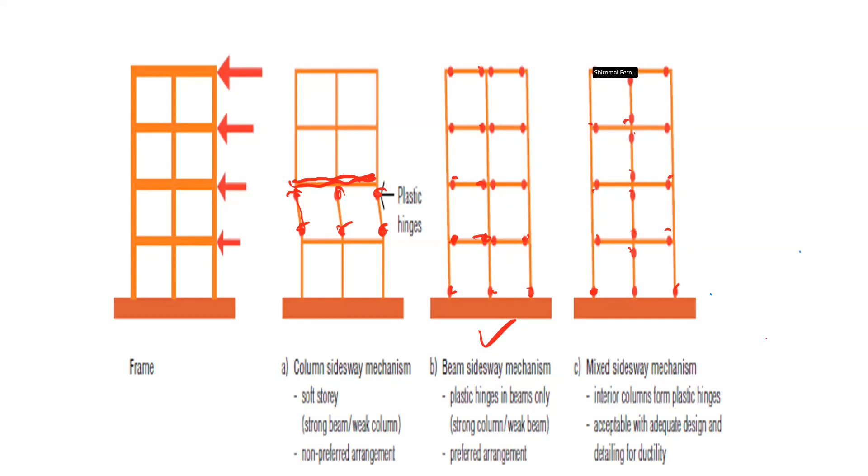Or like that - so we also can. So actually, the engineer has to decide how to dissipate the force. Basically you have to select the preferred location to have the hinges when there is an earthquake. And if it is done in the correct way, we call this ductility detailing.

Now, this is what happens during an earthquake - this hinge failed.

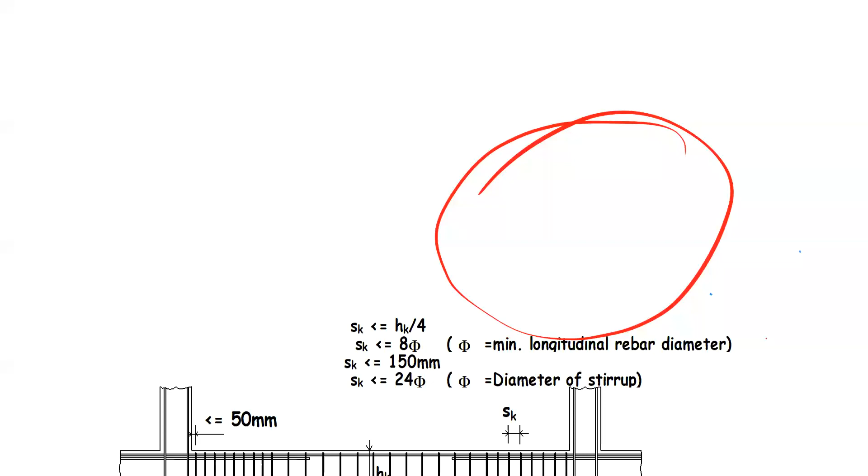Therefore, if we want to survive, we have to increase the shear reinforcement. By doing that, you confine the concrete, and it can last for a couple of seconds. As I told you, this will die down very fast - after 4 seconds, it's negligible. So if your building can survive, these joints can survive.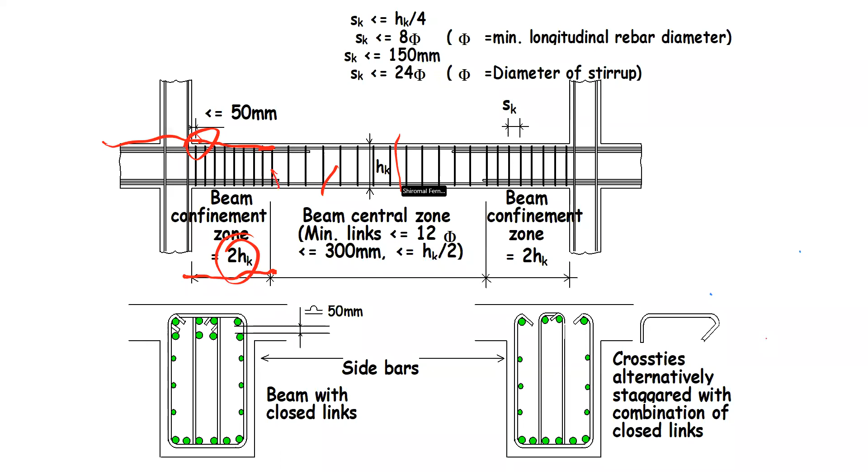We normally don't put laps very close to the joints. There are rules like your laps should be 2h away from the joint, where h is the height of the joint. Likewise, these are called prescriptive rules, introduced by the Society of Structural Engineers.

These are also copied from other guidelines. So here again, confinement - we have increased the confinement zone, and the laps are preferred at the center.

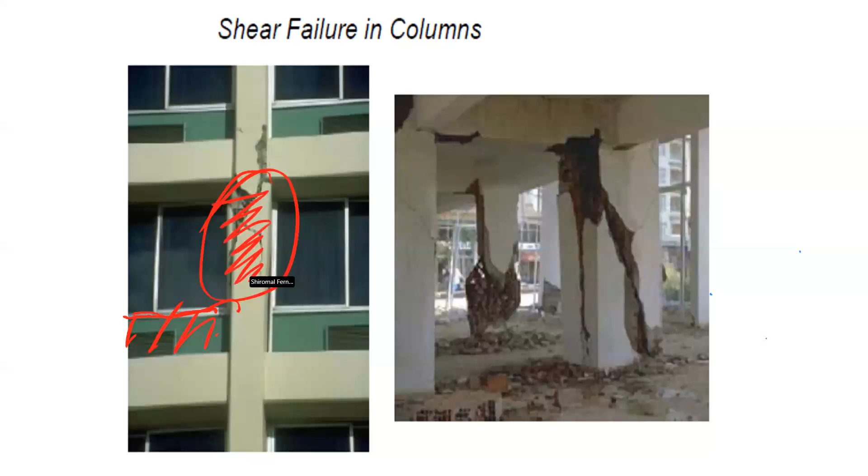And here, you have a wall - because of that, this becomes a short column, so in that case we have to have more reinforcement. In this one, you can see where this is open now - this is why we tell the contractor, you need to have this kind of thing.

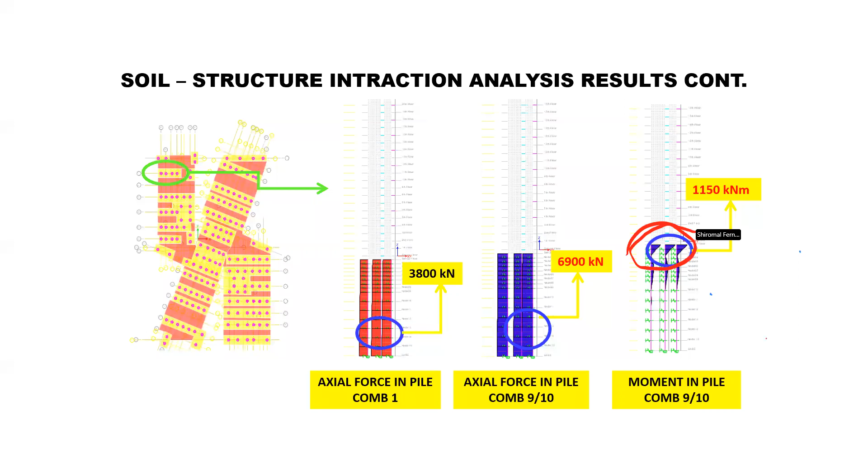I know it's very difficult, but if you want to improve your ductility detail, you have to do that. Especially at the connections of the piles, you get a larger moment, so you need larger reinforcement, confinement reinforcement, as you can see, 100 millimeter spacing. The minimum reinforcement for both piles is 0.8%. Generally, for normal design, we put 0.5% for both piles, but we can prove that you need a little bit more reinforcement.

And mainly, when detailing, most people die because of ceilings falling on their heads or brick walls falling on them. So if you are designing for earthquakes, we need to have anchors to your walls, to the main frame. These details are introduced in our guidelines.

When we compare the wind and the seismic demand, generally the structure will be designed for the full demand. With respect to seismicity, when there is a force, cracks will form, and it will reduce the stiffness, and it will not absorb the full force. It will be reduced. So therefore, we will not...

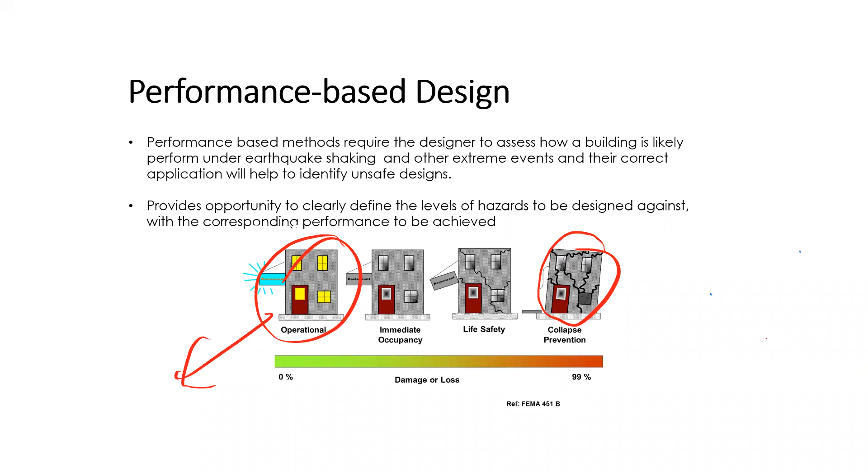Right? So if you say fully operational, then he has to pay the cost for that. We have to put a lot of reinforcement. Or you can say, okay, no problem, a small crack, but I need immediate occupancy. So this is a wise decision. We have to balance the cost versus the damage.

So we actually modified this a little bit to suit our country, because considering that we have a low seismicity, we decided to have these objectives. That is, we consider different return periods: 50-year return period, 500-year return period, 2500-year return period.

So wisely, what we thought was, since we are in a very low seismic region, our objective should be: if there is a 50-year earthquake, it should be fully operational. If it is a 500-year earthquake, it should be immediately occupied. And if it is a 2500-year earthquake, which is very rare, then it's life safety — people will not die, but we have to break and rebuild the building.

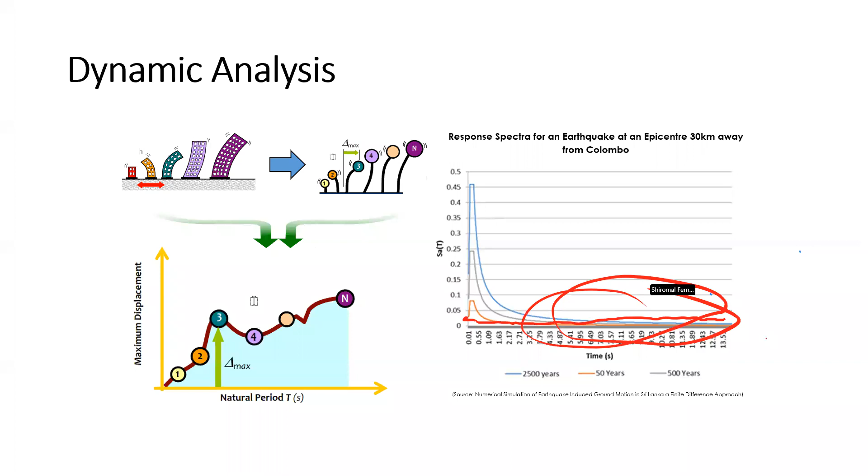Actually, most of the codes have response spectrum up to 4 seconds, because if we have very large buildings like 60-story, 70-story buildings, even Lotus Tower, the period is in the range of 9 seconds. So also we can see when you have very large spectrums, we are thinking about what to do for this range. Hopefully we can get an answer within a couple of...

And when you do analysis, we need to consider about 90% of the mass having participated, because mass is the main thing. You can see 90% of the mass is around... we had to consider about 56 modes to do that.

So basically, we have to apply the earthquake in two directions. We use 100% in one direction, and we apply 30% in the other direction. So then we can get the story shears based on the response spectrum.

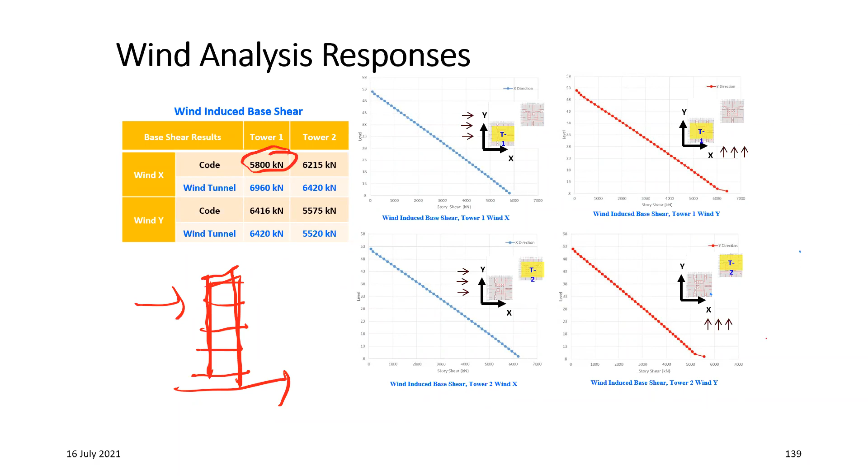Look at this, tower 1, base shear 5,100, 5,800 in the x direction. Remember this one. And if you go to the wind, tower 1 is 5,800. So that means wind or earthquake, we get the same base shear. That means, especially in countries like Sri Lanka, one is wind governs the design. The second is, if we design for wind and detail for earthquake, we can mitigate the effect on earthquake. So that is also possible. If you cannot design for earthquake, still if you detail for earthquake, it will mitigate the issue.

So these are some of the regulations noted by the Australian codes. So generally, irregular buildings are not advised, and irregular mass is not advised. Let's say if you have a building like that, we normally put a seismic joint here, and if you have a transfer floor, then this transfer floor will attract a lot of mass. Mass is high, forces will be very high. Therefore, these joints has to be very well designed. Otherwise, the whole building will collapse due to the earthquake, right? So also, therefore, the mass variation is also not preferred.

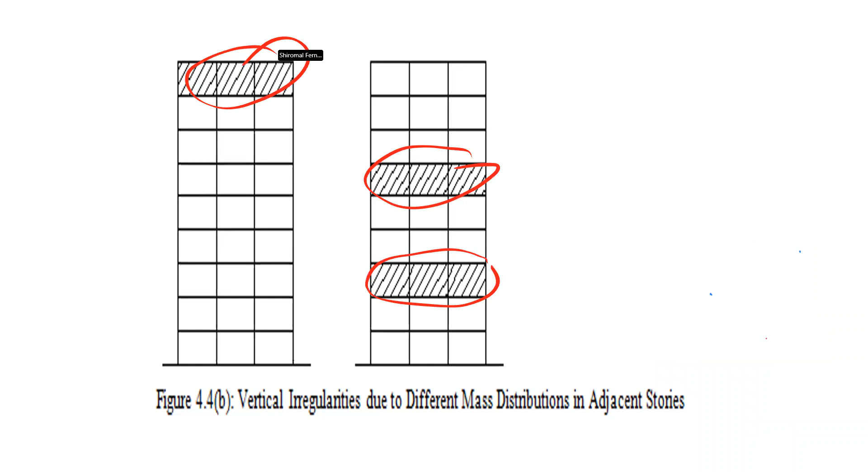However, since we have a lot of software now, these are designer, if they have the confidence, we can ignore these recommendations.

So I have discussed about today with respect to loads, the gravity loads, and the wind load. We discussed wind load and also the earthquake loads. Next time we will discuss with respect to the building, how to plan the building from basement to roof, and how to think about it with respect to the concept.

So very important, as initially we need to study, know the loads, how to apply the loads. We need to see how to tackle the loads with respect to the basis of design.

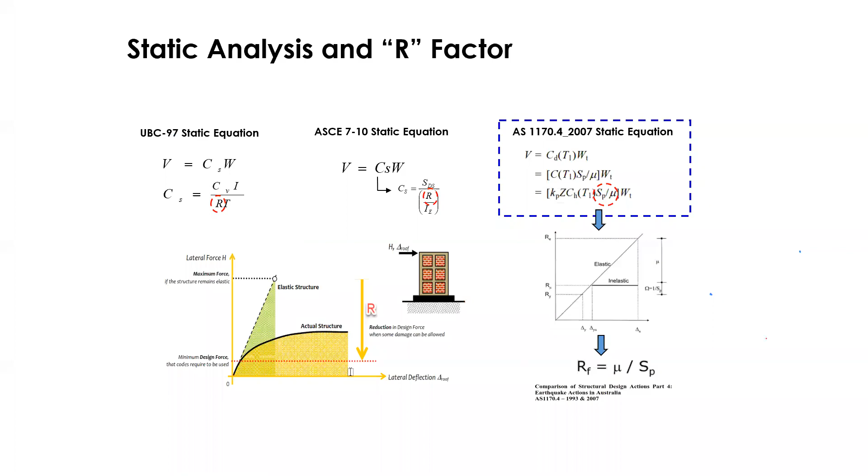Thank you for your presentation, Engineer Shiromal. I have a question that you saw the failure of the Christchurch church. So you said that the load is higher in the top, but when you consider a building, the demand of the bottom columns are higher because we have to add all the mass into acceleration, and it will be the demand. By looking at the structure, we can see that in the top also the mass is not that much high. So what's the reason actually for the failure? You said the load is higher, but I don't think that's a reason. So could you please explain?

No. What we have to understand is now in an earthquake, force, when there is a horizontal load, right? So the base is also moving with that load. So actually there is no resistance. So therefore, the horizontal, there will be no, if you resist only, you will get a force. The inertia force at the top is much higher because it's trying to resist the movement.

But inertia forces depend on the mass, no? But looking at the structure, the mass is... Correct, mass. But now if the inertia force is less, let's say now if the foundation is on the rock, and if the rock is shaking, the lower levels, you won't, it will go with the rock, so you won't get any force. Yeah. Because if you resist, definitely you will get a force.

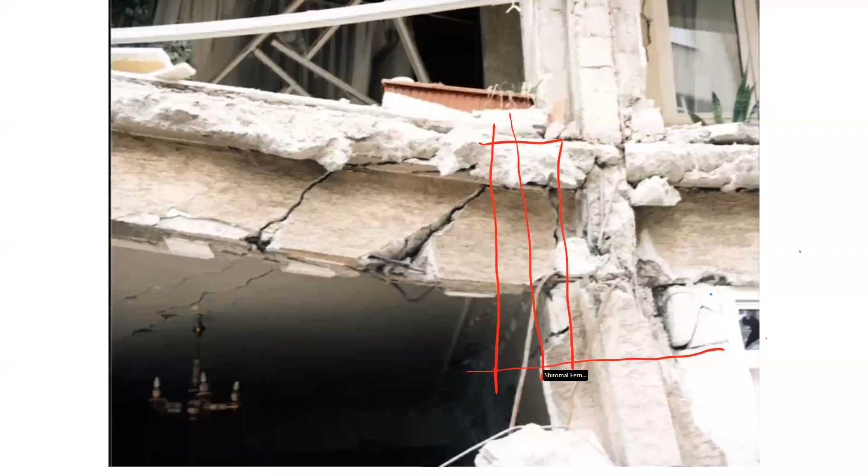My question is, does it depend on the time period of the earthquake's occurring motion - meaning I am asking whether it depends on the resonance of the building, or whether it depends on the time period, because in your graph you showed the time period of the occurring motion. So my question is whether it depends on the resonance or whether it depends on the occurring time period. Now, it's like this.

Now, every building has a period. Actually, a tall building has many periods, but the major thing I'm talking about is the first mode. So shorter buildings will resonate because their period will match very quickly with the period of the first few seconds, giving very high acceleration, and it will resonate.

You have two questions. One, it can resonate - if it matches the building period, yes, it will fail. The other thing is it will attract force. If you have acceleration, you have attracting force, and due to that force you will have cracks in your building. So both can happen.

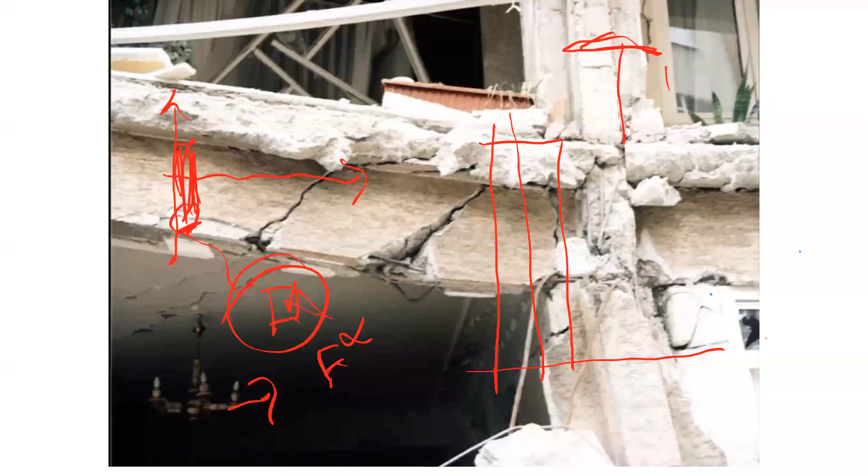So in Nepal, if you look at the buildings in the 2015 earthquake, the low-rise buildings survived. It depends on where the building is located. In Nepal, because it is soft soil, the period is amplified - that's why the resonation can happen. The low-rise buildings survived because of the amplification that happened due to the soft soil period.

So when the soil is soft, you get higher amplification and the period becomes longer - this can happen for tall buildings. Now say for instance we have a tall building in Sri Lanka, but there is an earthquake in Pakistan - it will travel to us and have a larger period, which can match with and affect high-rise buildings. That is also possible.

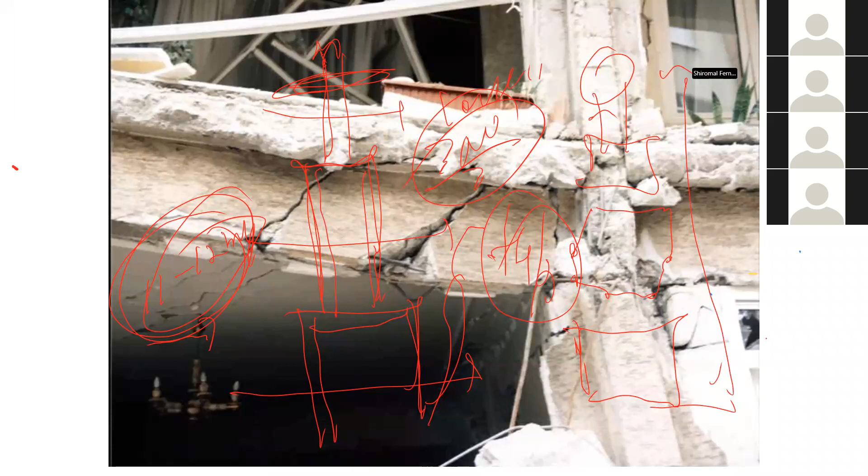There are a lot of cycles, million cycles within one day. So therefore, we have to be very careful when we are designing a slender, tall structure. It is like an 87 meter tall tower. Okay, thank you. Yeah, thank you.

So I have a question related to Lotus Tower. When you consider the building, you normally consider the first mode period as n/10, no? So similar to that, how did you validate the finite element modeling in Lotus Tower? And another question, in Lotus Tower you have the antenna structure, so the first mode, I think mostly it will be covered by the antenna structure. So did you get that type of mode shape or a different mode shape?

Actually, it's a good question. What we observe is the building mode. The first mode is a circular symmetrical structure. So we got about 7.8 seconds for the first 2-3 modes for the tower, and for the antenna we got the other modes in the range of 1.5 seconds. So the tower modes were the first modes that we observed, and then the antenna modes.

So you modeled both separately, no? No, modeled together. Model together. Okay, okay.